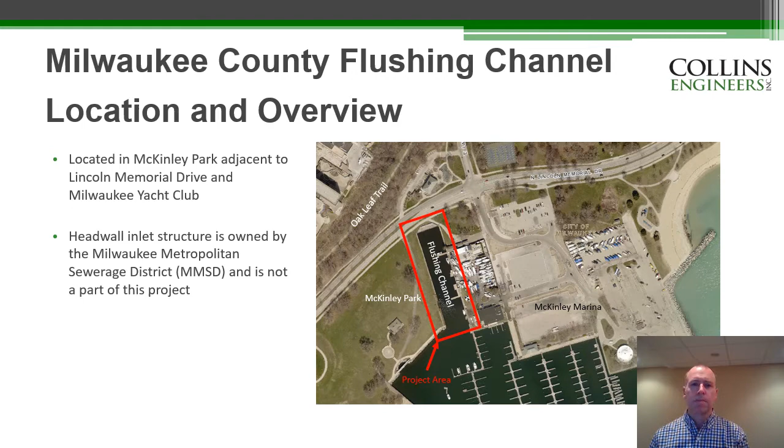The Flushing Channel was originally built to draw water from Lake Michigan and pump it to the Milwaukee River in order to flush lower quality water away from the city and into the lake. The pumping facilities were built in 1888 and were maintained until 1992. The pumping operations were located in the building on the north side of Lincoln Memorial Drive that now houses Collectivo Coffee. The Flushing Channel is now used by the Milwaukee Yacht Club to load and unload boats and is a popular fishing spot.

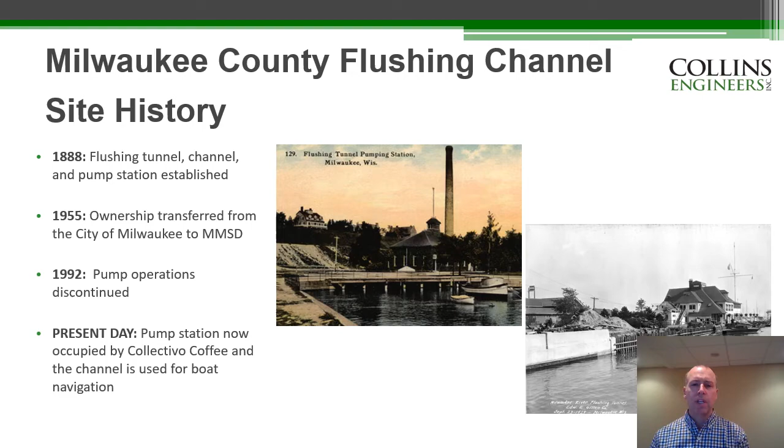Sections 2, 4, and 6 are original construction with timber piles and sheeting with timber deadman anchors. Section 3 is the MMSD property and consists of concrete piles and steel sheet piling. Section 5 is the Milwaukee Yacht Club loading and unloading access area and has steel sheet pile with steel tiebacks. Records of this construction are not available, but it is assumed that the steel sheet pile were installed in front of the original timber piles and sheeting.

In addition to the timber piles and sheeting in Section 6, there is a timber pile supported pier used by the Milwaukee Yacht Club for tying up boats. Section 7 consists of steel sheet piling and only minor adjustments are anticipated to tie the existing construction to future rehabilitation.

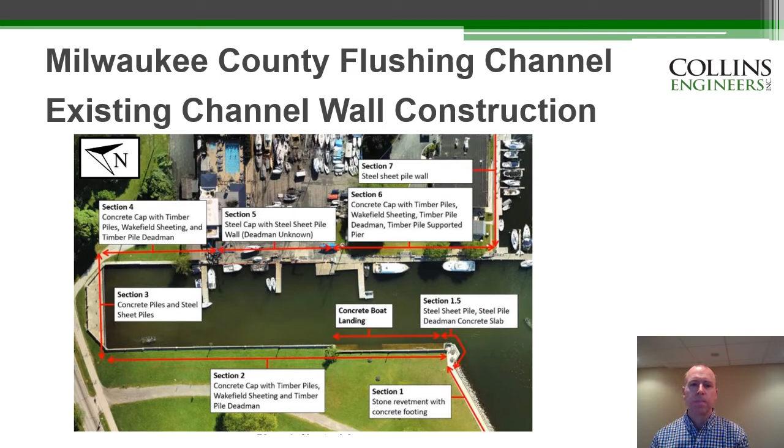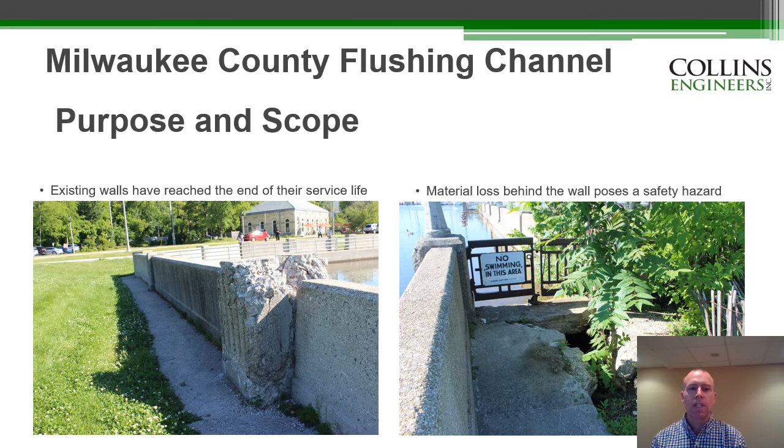The existing walls have reached the end of their service life, and replacement of the timber piles and walls is desired. Some examples of concrete degradation and lost material behind the wall are shown in this slide. The current conditions have created a safety hazard that needs to be corrected.

Collins Engineers, under direction from Milwaukee County, conducted an inspection of the existing facilities. This consisted of an underwater inspection of the timber piles and walls and an inspection of the above water portions of the walls. The underwater inspection consisted of visual and tactile inspection of the submerged sections. Sample sections approximately every 100 feet were cleaned and inspected. Ultrasonic thickness readings were taken on the steel sheet pile, and a hydrographic survey was obtained to identify channel bottom elevations.

The above ground inspection included a topographic survey obtained by drone technology. In addition, soil borings were taken behind the walls so that geotechnical data could be gathered to support the recommended repair design.

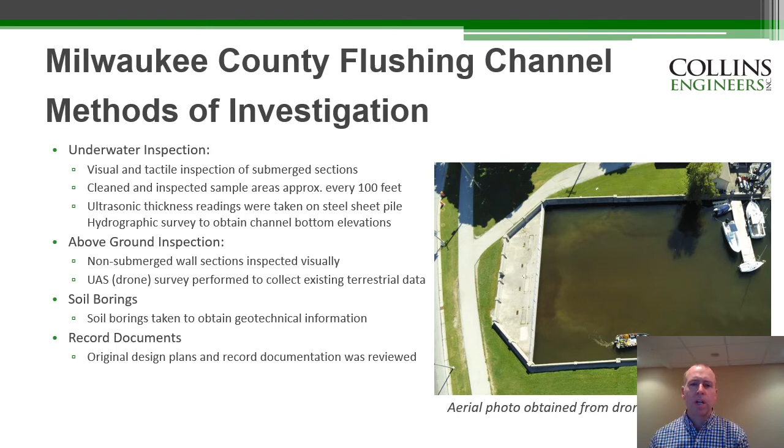The above ground inspection found deteriorated concrete and settlement of the walls, with some portions rotated out of position. Additional examples of concrete deterioration are shown on this slide.

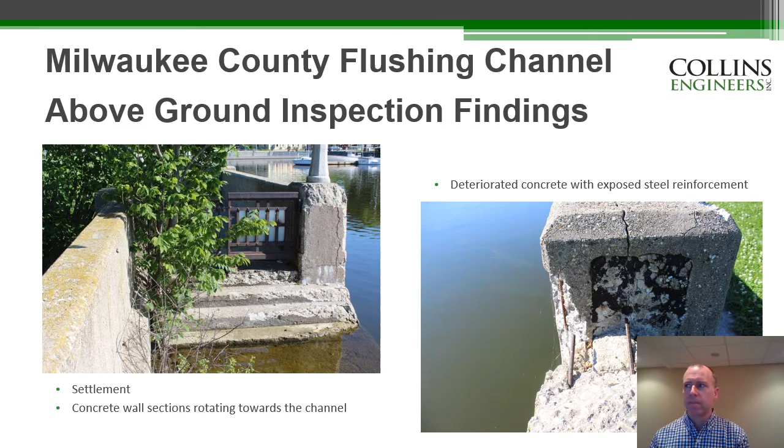The underwater inspection found that the timber piles and walls are in poor to severe condition, with holes causing backfill material to be lost through the wall. This loss of material is causing sinkholes behind the wall, which are creating a safety hazard. The existing steel sheet pile wall at the Milwaukee Yacht Club loading and unloading yard has corrosion and is in need of rehabilitation to ensure its functionality.

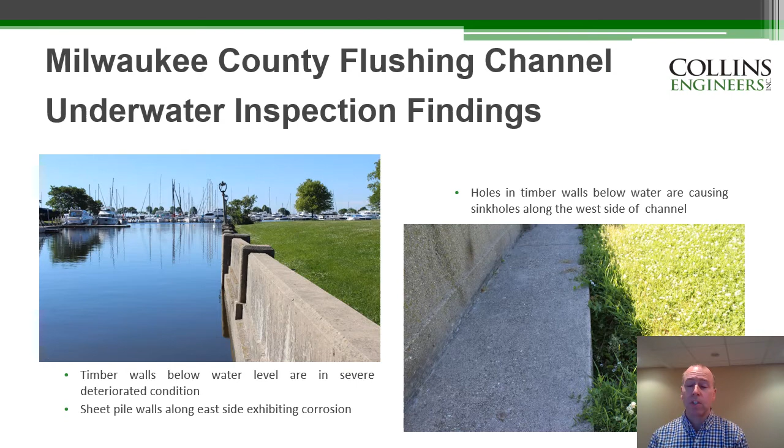Some of the considerations necessary as part of the design process include that the water level for Lake Michigan is currently higher than normal. There are existing buildings and yacht club amenities very close to the existing walls. The Milwaukee Yacht Club use and operations access needs also have to be maintained. Any work on the walls also provides an opportunity to incorporate facilities for public use and maintain the historical elements of the original construction.

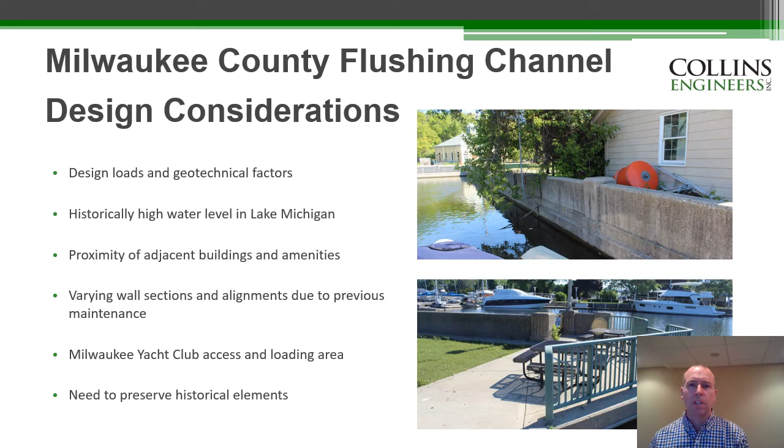The Milwaukee Yacht Club has several cranes used for loading and unloading boats. Any design and future construction needs to take into consideration the future uses of these cranes. In addition, the area behind the steel sheet wall is paved and in continuous use by the yacht club, so intrusive investigation of subsurface conditions and construction behind the existing wall is difficult.

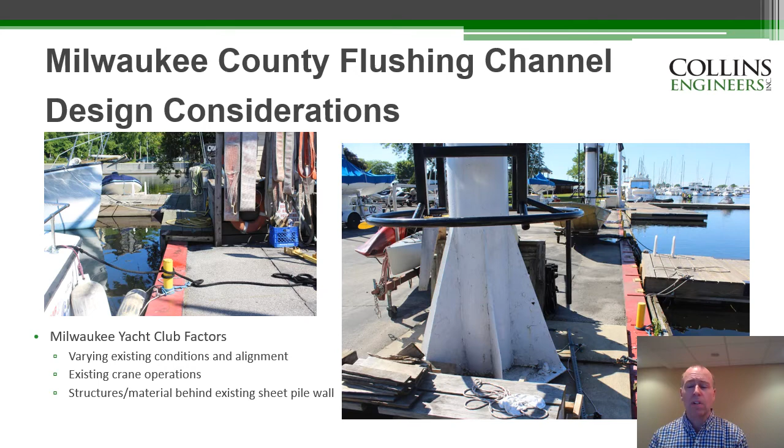Investigation studies looked into whether the existing timber walls could be maintained and found that maintenance costs and the risk of sudden and catastrophic failure made this not feasible.

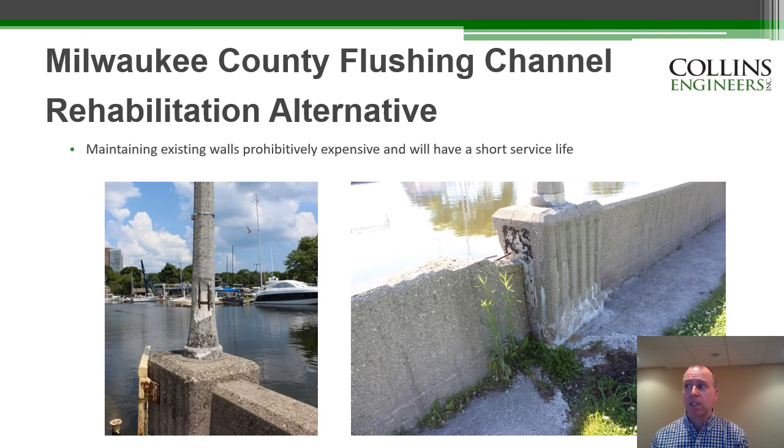Various alternatives for each section of wall were investigated. These included a new riprap revetment or steel sheet pile wall in section 2, alternate wall construction techniques in sections 4, 5, and 6, and the possibility of maintaining the existing steel sheet pile wall in section 5 through the use of a fiber reinforced panel and grout face.

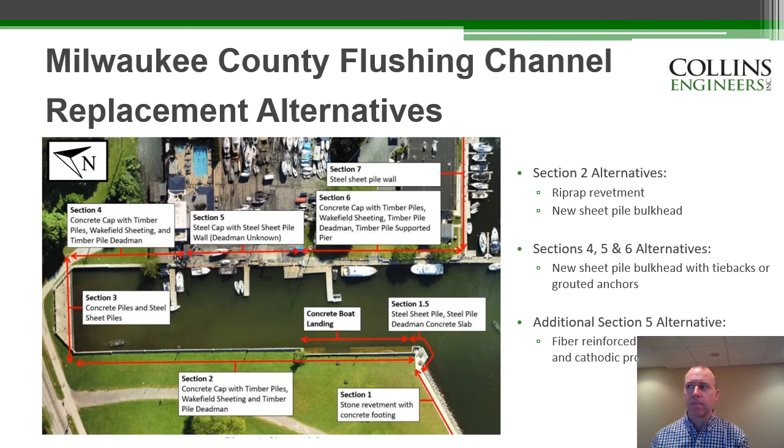In section 2, alternatives were considered. The first was a stone revetment. It would remove the existing wall and install stone to armor the slope. It would be very similar to the existing construction in section 1.

Some of the disadvantages of this alternative include the shorter service life. Storm and high wave events can cause loss of stone, which would require additional maintenance. It requires more demolition during construction, and some steel sheet piling is still needed to tie into the existing construction at section 1.5 and at the MMSD head wall.

There are also concerns about how close boats that utilize the channel would be able to get to the slope, because much of the slope is underwater and not visible.

Another disadvantage to the stone revetment option is that it allows access for geese and other waterfowl to migrate to and from the channel into the parkland. As evident in the current revetment area, this can create a nuisance from the numerous goose droppings that deter pedestrian use.

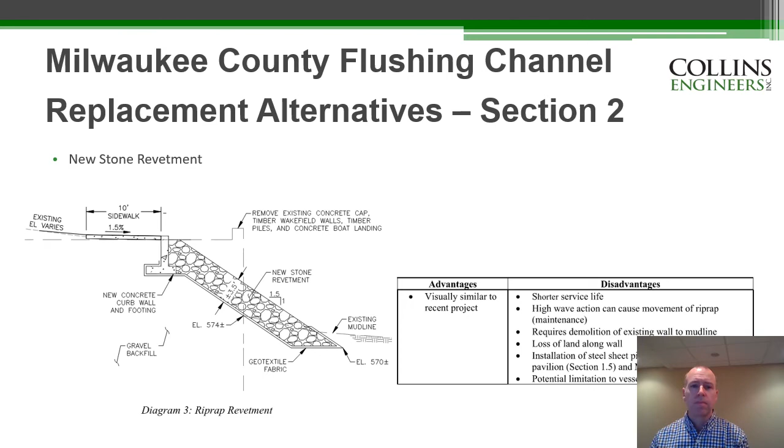In sections 4, 5, and 6, an alternative to install a new sheet pile wall with grouted anchors was considered. For this construction, the steel sheet piles are installed in front of the existing wall, and then anchors are installed from the front face of the wall at a downward angle and grouted in place.

The advantage of this construction is that there is less disturbance behind the wall. There are several disadvantages in that unknown obstructions such as old construction and boulders behind the wall could cause issues with the installation of the anchors. It also requires a specialty contractor that would need to work from a barge, which is often expensive. The tieback is necessary to prevent the wall from tilting outward.

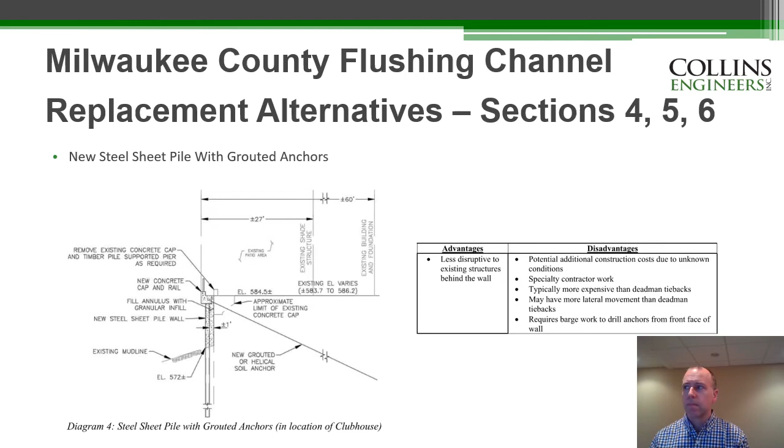For all of the walls, there is an alternative to install a new sheet pile wall with a deadman tieback system. Similar to the previous sheet pile wall construction described, the new wall would be installed in front of the existing wall. Some of the benefits to this alternative are that it requires less demolition of the existing walls and is similar to the existing wall. It does require excavation behind the wall in order to install a tieback. The tieback is necessary to prevent the wall from tilting outward.

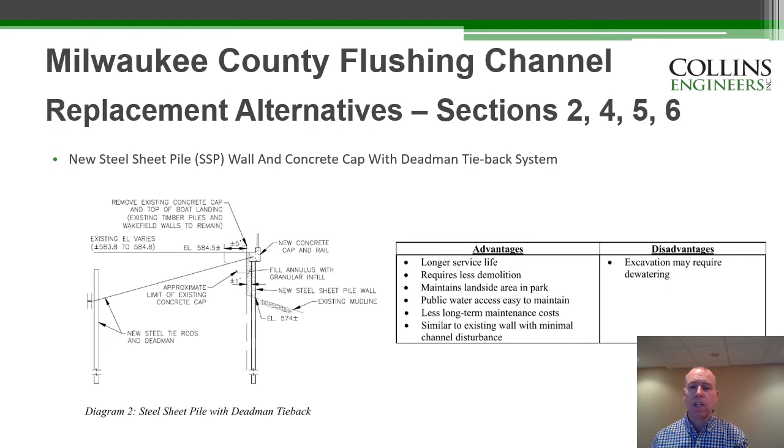In section 5, an alternative was considered to leave the existing steel sheet pile wall in place, but perform some rehabilitation. An additional consideration in section 5 is that the Milwaukee Yacht Club's cranes have limited reach and capacity, and any new wall placed in front of the existing wall would require the existing cranes to be moved closer to the water.

The rehabilitation would install fiber reinforced panels in front of the existing wall and then fill the space between the existing steel sheeting and the new fiber panels with a special underwater grout. This would seal the wall and prevent future corrosion, which is caused by exposure to both water and oxygen.

The advantage to this alternate is the lower construction cost and the limited disruption to the loading yard. It may not have the same life as a new wall, and it is recommended that the construction be inspected to monitor its performance and need for future maintenance.

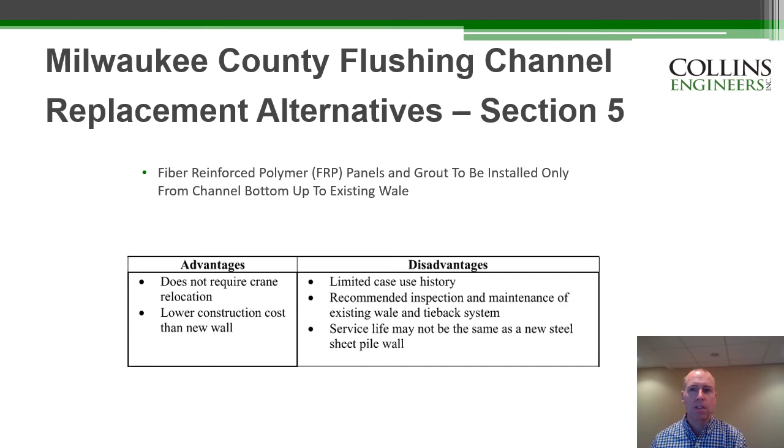In addition to the fiber panels and grout, another alternative was considered. This would consist of installing cathodic protection to the existing steel sheets to prevent future corrosion. The cathodic protection would place sacrificial anodes on the steel. These anodes corrode instead of the steel sheets. They require regular inspection and replacement as they corrode and degrade.

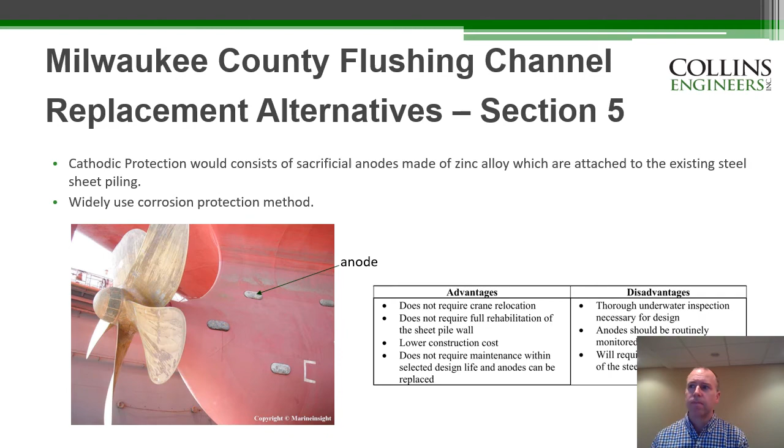Based on the advantages and disadvantages of each alternative, along with cost estimates, Milwaukee County has determined that the most beneficial option is to install new sheet pile walls in sections 2, 4, and 6 with tie-back anchors. In section 5, the existing steel sheet pile wall will remain in place and the fiber reinforced panels with grout will be installed in front of the wall.

A new concrete parapet will be installed on the steel sheet pile wall adjacent to the MMSD head wall to preserve the historic aesthetics of the flushing channel.

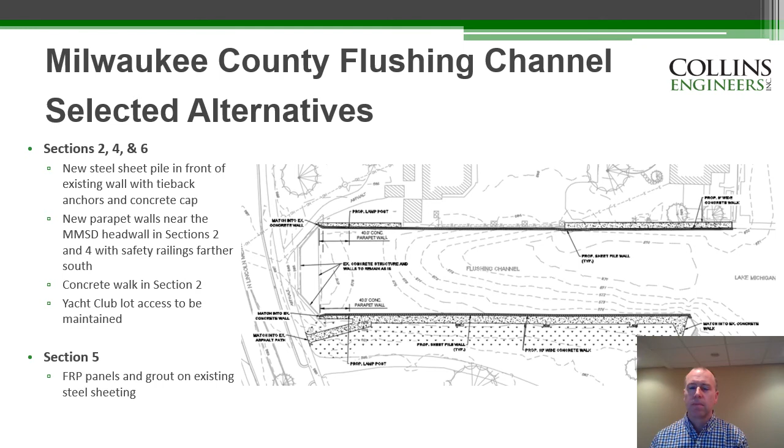A new concrete pedestrian path will be constructed along the west side of the channel to connect the existing concrete walkway along the previous revetment project identified as Section 1 to the pedestrian access along Lincoln Memorial Drive. The walkway will include ADA accommodations. Amenities such as pole-mounted lighting and benches with wheelchair space will be provided along the new walkway.

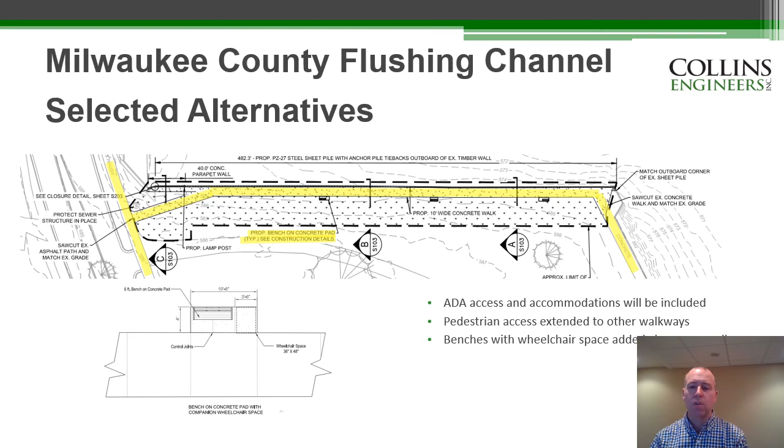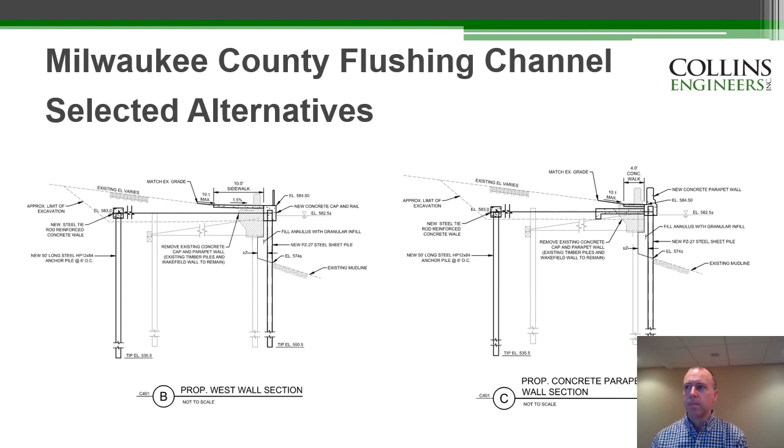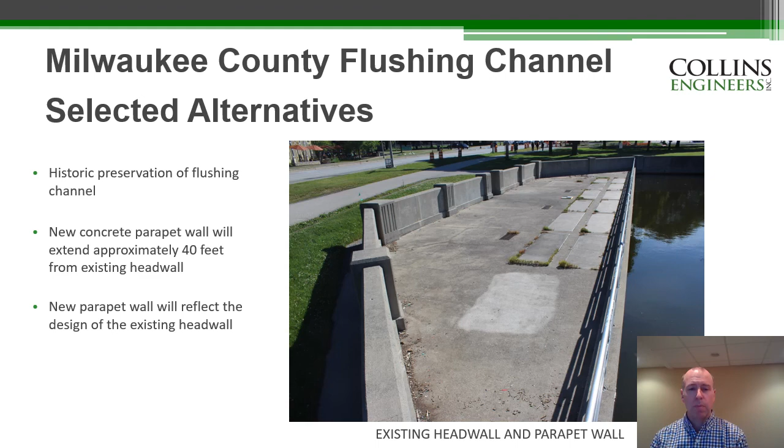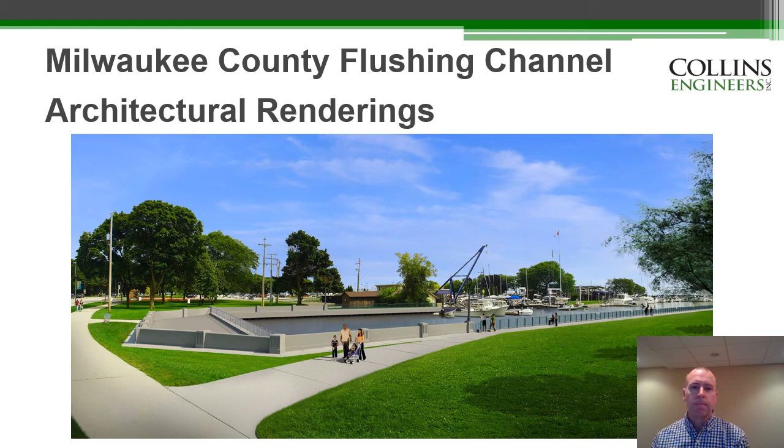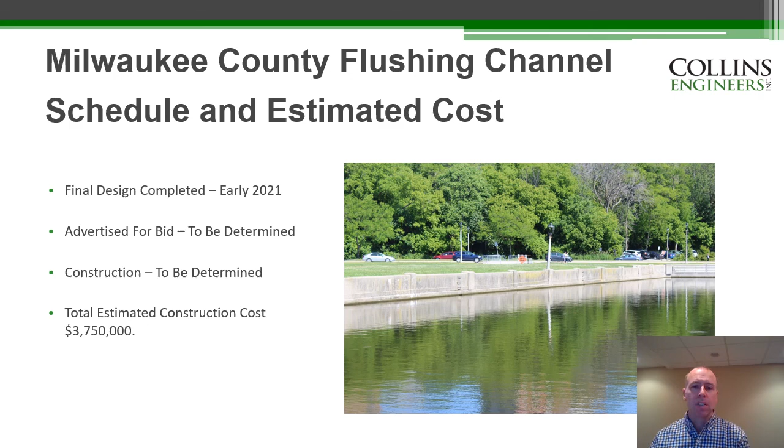It is anticipated that final design will be completed in early 2021. Milwaukee County will then determine when it will be advertised for bid and construction. The estimated total construction cost for the project is approximately $3,750,000.